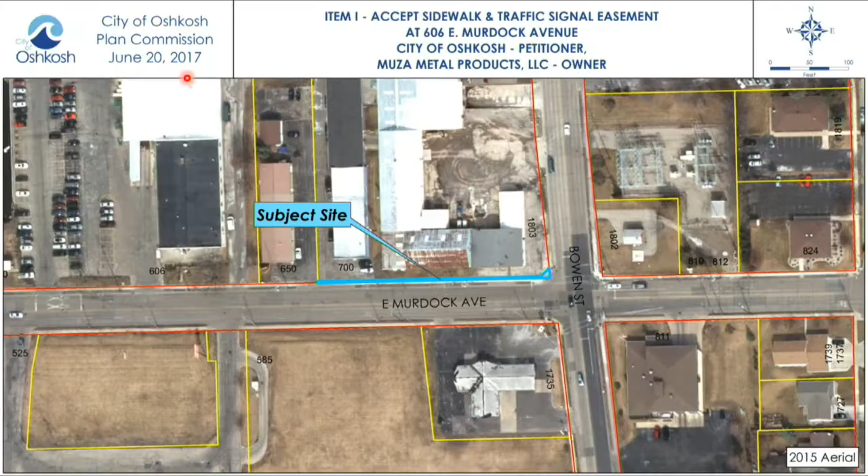The city's engineering division is requesting an easement from Muza Metal for installation of sidewalk, traffic signals, and related equipment. The easement will be about 2 feet wide, running 294 feet along the south property line to the southeast corner of the lot, including a 15.2 foot by 12 foot triangular area at the corner of Bowen Street and East Murdock Avenue. The easement is necessary to allow the sidewalk to be removed or moved away from the curb during reconstruction of this section of East Murdock Avenue, scheduled for later this year. It will also allow traffic signal equipment to be placed so as to maintain ADA accessible sidewalks and ramps, as well as create a larger terrace for snow storage.

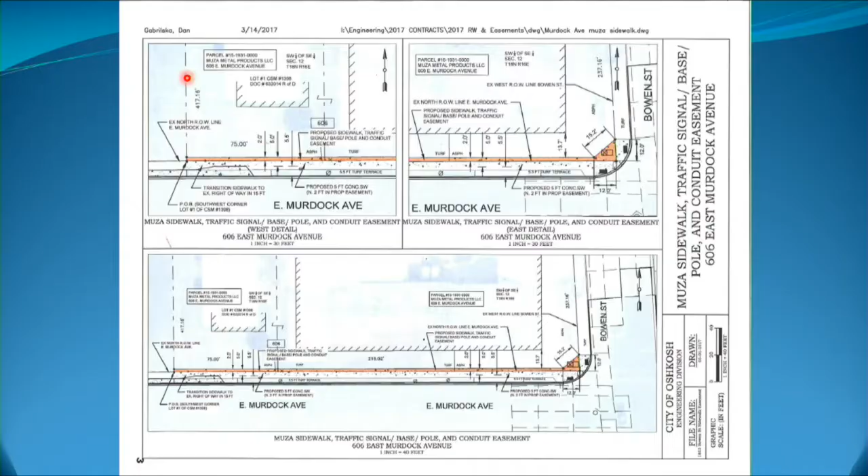Staff recommends approval of the acceptance of the proposed easement as requested. Any technical questions on this one? Seeing none, anyone here from the audience to speak to this item? Okay, back to the commission.

Move approval. Second. Any discussion on the motion? Okay, call the roll. Hintz, aye. Cummings, aye. Propp, aye. Kiefer, aye. Ford, aye. Borsak, aye. Wojtek, aye. Motion carried 7-0.

Let's move on to item number 2, access control variance to allow reduced spacing of driveways at the 2500 block of Harrison Street. Thank you.

The petitioner is requesting an access control variance to permit a 77-foot separation between driveways where municipal code requires a 125-foot separation. The subject site is a 1.7 acre parcel of land located on the west side of Harrison Street, south of East Packer Avenue and north of Libby Avenue.

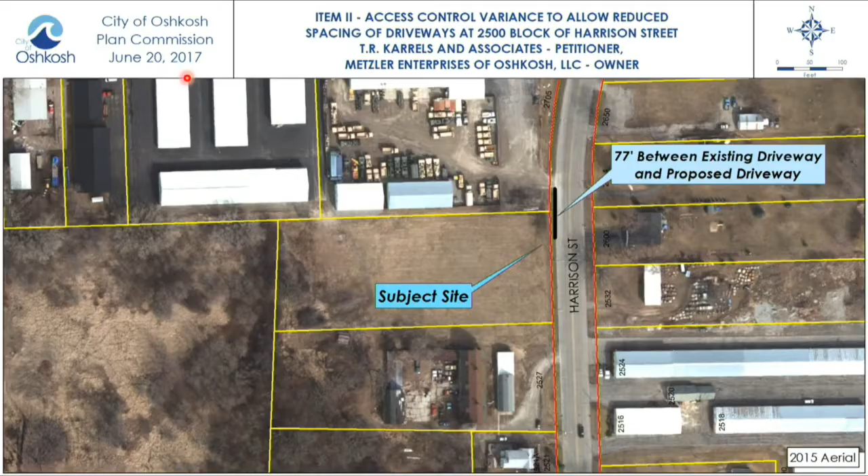Plans were recently approved for construction of a new personal storage facility at the site. Here's the plan for the new site. The petitioner has planned to construct a 17-unit personal storage facility on the subject lot. The proposed driveway access will be separated from the existing driveway on the property to the north by 77 feet. An access control variance is required as a 125-foot separation is required.

According to the applicant, the reason for the variance request is that an existing utility pole would need to be removed in order for the driveway to meet the minimum separation from the driveway to the north. The petitioner also states that the separation reduction would not cause any safety concerns, as the personal storage facility will have low traffic volume. Staff does not have any concerns with the driveway separation reduction, as this stretch of Harrison Street experiences relatively low traffic counts. The new use of the property should generate only minimal additional traffic, as the facility is expected to be accessed infrequently.

The existing driveway entrances to the north and south are separated by about 239 feet according to the site plan. This results in hardship, as it does not allow the new driveway to meet the 125-foot minimum spacing requirement from each of the existing neighboring driveways. The location of the existing utility pole also poses a hardship, as it is centrally located along the lot frontage, which restricts the driveway from being constructed further to the south.

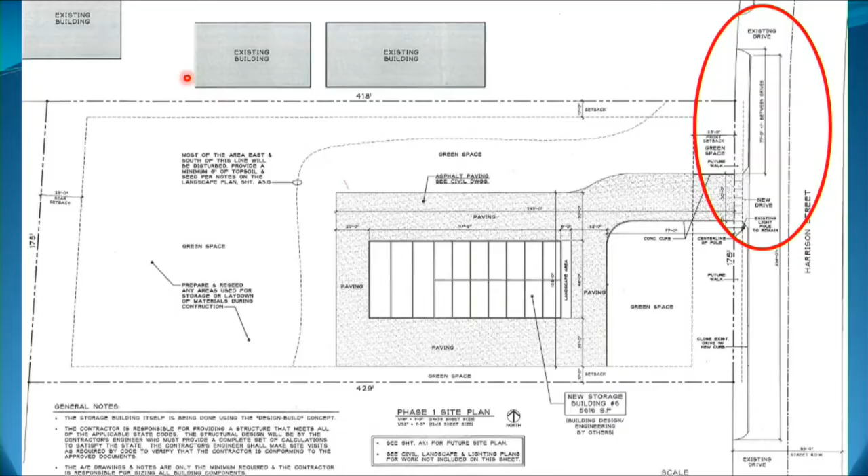Staff recommends approval of an access control variance to allow a 77-foot driveway separation at the 2500 block of Harrison Street as requested. Okay, technical questions?

None. Anyone here from the public to speak to this item today?

Okay, back to the commission. Move for approval? Any discussion on the motion? Okay, call the roll.

Hintz, Aye. Cummings, Aye. Propp, Aye. Kiefer, Aye. Ford, Aye. Borsuk, Aye. Wojtek, Aye. Motion carried 7-0.

Moving on, item number 3, approval of general development plan for multi-tenant retail office use located on the 1000 block of North Washburn Street. The applicant is requesting approval of a general development plan for the construction of a multi-tenant retail and office use located at the 1000 block of North Washburn Street.

The subject development area consists of a single vacant parcel, approximately 3.17 acres in size. The property has an SMU PD zoning designation, and the 10 and 20-year comprehensive land use plans recommend commercial development for the site. The proposed development site is bounded by North Washburn Street on the north and east, and big box retail establishments on the west, and Dick's Sporting Goods and PetSmart on the south. The land use pattern in the area is characterized by established retail and service uses such as Lowe's, Quick Trip, Panera Bread, and Dick's Sporting Goods.

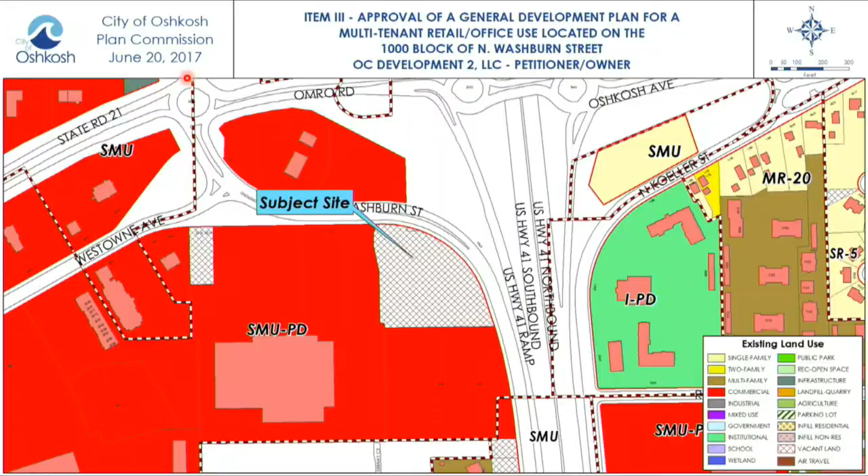The proposed uses are consistent with the recommended land use in the city's comprehensive plan, and both retail and office uses are permitted in the underlying suburban mixed-use zoning district. Approval of the proposed development plan will meet the requirements of the Planned Development Overlay District.

The proposed tenant spaces will have approximately 30 to 60 daily employees, and the businesses will be open during normal business hours of operation, typically between 6 a.m. and 10 p.m. The proposed development plan would include a total of 3 structures, which will house between 1 and 4 commercial units.

Phase 1 of the proposed development plan will include construction of a 2,501 square foot bank with a drive-through facility and an 8,252 square foot structure to house approximately 4 retail or commercial tenants. Other Phase 1 improvements include 3 refuse enclosure areas, surface parking lots, facilities, and site landscaping.

Phase 2 would include construction of a 5,746 square foot structure to house approximately 3 retail or commercial tenants. The buildings are proposed to be located on the north and east portion of the site, so that the main entrance areas face south and west towards the internal commercial campus. Parking areas are proposed to be located at the southwest corner of the site, abutting the existing internal shared roadway.

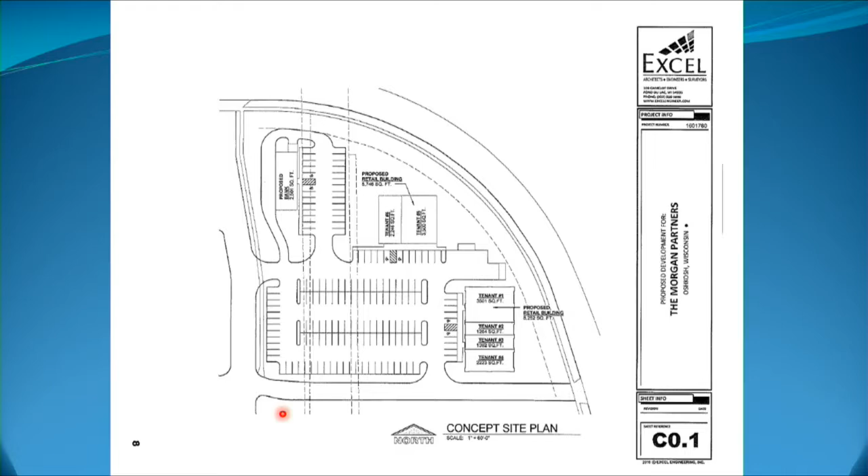Vehicular access to the site is proposed to be provided by 2 existing access drives running from North Washburn Street to the development site. The first existing access drive straddles the south property line, right here, and the second runs north-south from North Washburn Street to the internal roadway intersection.

The internal circulation for vehicles is well defined, with inclusion of landscape islands at entrances and parking rows, with the exception of pedestrian walks directly in front of the building's entrances, and an existing 5-foot wide walkway running along the west property line. The submitted plans do not provide any pedestrian connection to the public sidewalk on North Washburn Street or the walk at the internal roadway 4-way intersection.

Staff recommends a condition of approval that formal pedestrian access be provided connecting the pedestrian crossings at the internal roadway intersection through the subject development to the public sidewalk on North Washburn Street.

The proposed 159 parking spaces exceeds the range of the code-required minimum 78 stalls. Upon specific implementation plan review process, a conditional use permit would need to be granted to permit the parking facilities to exceed 125% of the development's minimum number of required parking spaces.

The submittal does not include a lighting or photometric plan, but all lighting on the site will be required to meet zoning code requirements, and it will be analyzed during the specific implementation plan review process.

Signage for the site is proposed to consist of both wall-mounted and ground signage. The petitioner is proposing a 12-foot tall multi-tenant monument sign, seen on this slide, to be located at the northeast corner of the subject site. The final signage plans will be required to meet code requirements and will be evaluated during the SIP approval process.

A conceptual landscaping plan for the site has been submitted with the application and includes a variety of shrubs and trees. The proposed landscaping is dispersed along building foundations and refuse enclosures and will buffer the paved areas throughout the development site. Internal landscaped parking lot islands are proposed to contain trees and other vegetation that will act to break up the mass of hard surface associated with the parking lot.

Staff identified that the internal landscape parking lot islands do not appear to meet the code required 7 feet wide and 250 square foot minimum area. Staff recommends that the petitioner adjust the width of the parking lot landscape islands to meet code requirements to ensure that future landscaping can be supported. The final landscape plan will need to meet zoning code requirements and will be analyzed during the SIP review process.

The petitioner has indicated that stormwater from the site will be directed to the stormwater detention basin on the neighboring Lowe's site, which was sized to take in the additional volumes for the entire developable area. The Department of Public Works has reviewed the proposed development plan and noted that documentation and designs must meet the city's stormwater performance criteria for both water quantity and quality control. Final stormwater management plans will need to be reviewed and approved by the Department of Public Works as part of the site plan review process.

Proposed building elevations have not been submitted at this time, but will be submitted and analyzed during the SIP review process. The proposed structures will need to meet the commercial building design standards, which are found in the zoning ordinance.

Staff believes that the development will have a positive impact on surrounding lands, and will be harmonious with the intended character of the general vicinity, and will not be detrimental to neighboring properties or the community as a whole. Staff also feels that the proposal reflects the city's development and planning policies, enhances the appearance of the area, and is architecturally compatible with nearby and adjacent structures.

As such, staff recommends approval of the general development plan with the following conditions. Formal pedestrian access separate and distinct from the vehicle drive lanes be provided connecting the pedestrian crossings at the internal roadway intersection through the subject development to the public sidewalk on North Washburn Street. A conditional use permit be granted to permit the parking facilities to exceed 125% of the development's minimum number of required parking spaces in conjunction with specific implementation plan review process, and proposed internal parking lot landscape islands meet code requirements upon specific implementation plan review process.

All right, thank you. Technical questions?

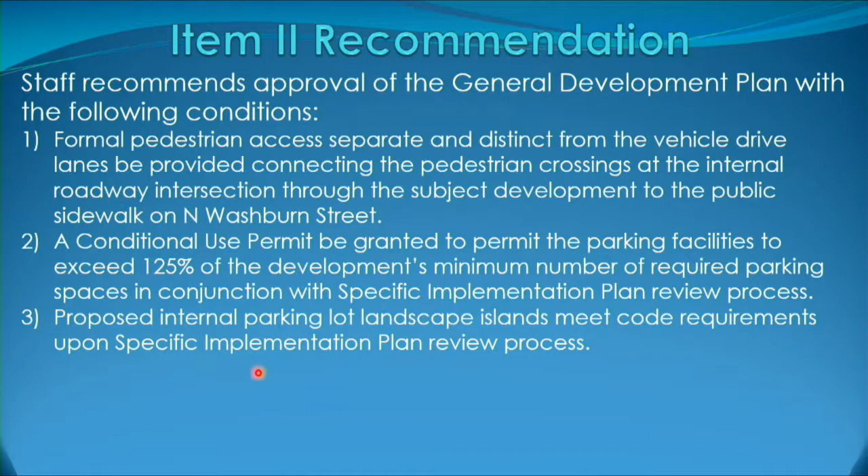Gaddy? This is probably a question for the petitioner. I hope they're here. The number of parking spaces seems utterly excessive. It's twice the number of the maximum that our parking ordinance would suggest. I don't know if staff wants to comment on this now, or we can wait until the petitioner talks to us.

Well, Ed was on his way back from Green Bay. He got sidetracked, so he was supposed to be here. So, let's see if we can go to a couple other questions first. Okay, but it is, you're right. It is larger than we allow right now.

I think some of the responses that you might get on this particular one is that you're kind of confined to a certain footprint because you've got Dick's. Yeah, no, I understand that. So the only way to do it would be you'd be decreasing some of those areas in favor of green space. Potentially get some green space, but I'd defer to Ed on that, when he shows up. Or David, that can be, it still has to come back through SIP as well.

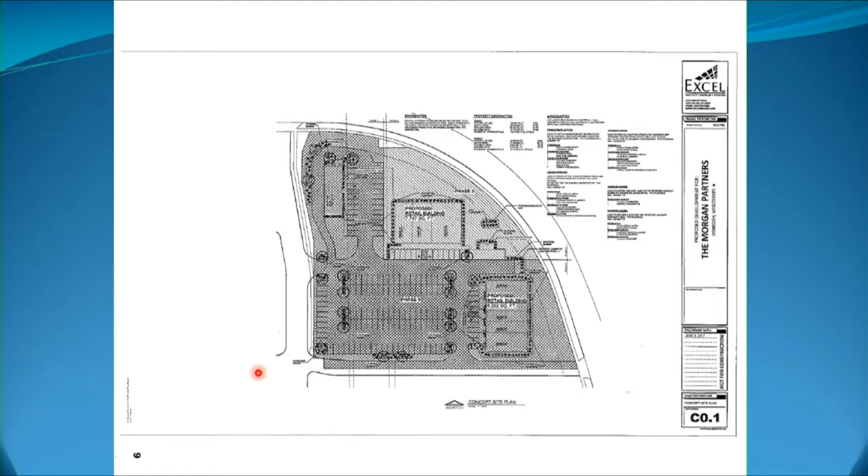Just David and then Steve? Will the building designs come back here for SIP? That is correct. When we broke out the process, the GDP versus the SIP, the GDP was meant to be kind of like a preliminary plat, so you would just get a concept of basically what it is before they had to submit the detailed plans for the landscaping, the architecture and all that.

That's correct. But the process is also supposed to identify any concerns that you might have going forward when the SIP comes forward. So if there's some concerns, we can put that in. The applicant will know that. We can get that in the minutes. Things like if Ed's not here, the parking situation and the reasoning for that.

And the follow-up to that, or the genesis of that question, when we had some other development in that general area, we had concerns about how it appeared either from 41 or from Washburn. I would hope that it'd be conveyed to petitioner our expectations of how it's going to look facing the corridor and the frontage road.

And the good news is the buildings are close to the street as opposed to looking at parking, but hopefully they're nice to look at. Exactly, because it's going to be the backside of the building. We've had the same concerns along Westtown, if you recall, because you have all the stuff between Westtown and 21, and that's where we put a lot of emphasis on the back of the development, so it wouldn't look like the back of the development. I think you want the same thing here.

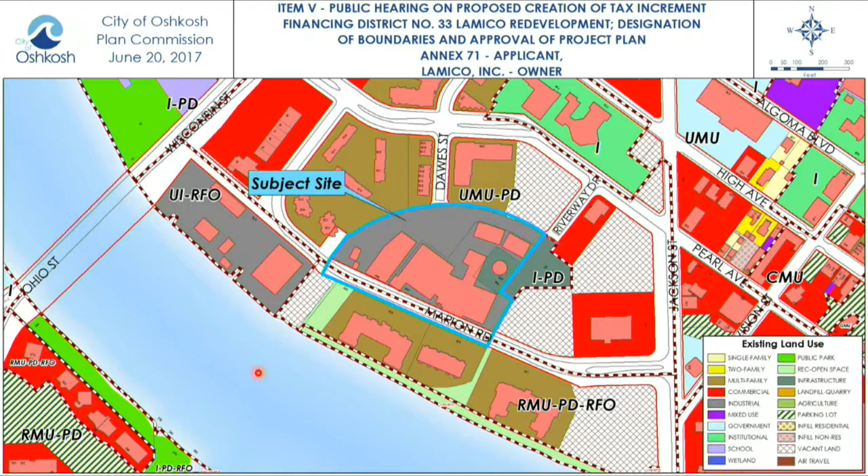The project plan, we'll go over a little bit of it, also includes costs, and hopefully Jeff put it in there. There's an aerial of the site so you can see what's going on in the area. Here's the old Lamico site, here's the water tower site, and there's another one being built right now that you can see down there. You can see the kind of development pattern that's in the area. This is the newest building being constructed right now.

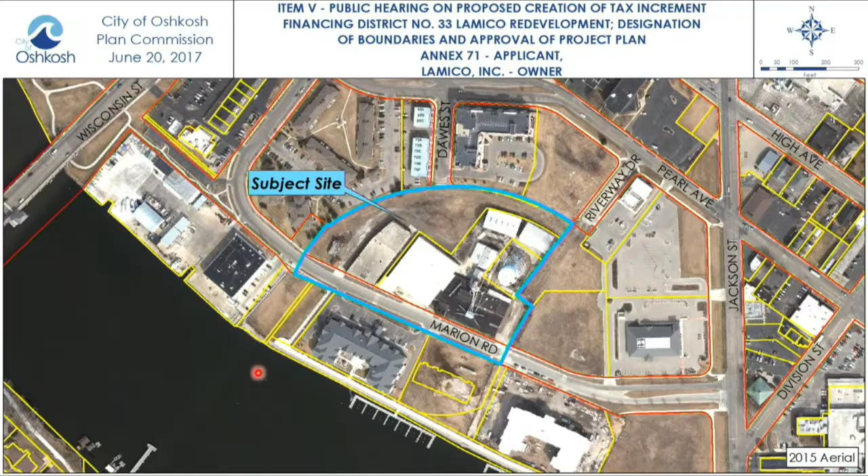But also as part of the project plan, we're including costs for cul-de-sac construction here at Dawes and here at Riverway, and we're also including funds for a pedestrian trail to connect to our regional trail system. So you'll be able to access the trail and go up between these two sites where we have an access easement and that small public park area, so they'll connect up to Riverway. So that's included into there.

Some other utility costs are included. They're also widening out the sidewalk along this property. We are, as a result of the creation of this district, we're proposing, we're estimating about $15 million in increment value that'll be offset on here. Trying to figure out what else.

Well, there are things I wanted to hit on in the particular plan. Let's go to the project plan itself, and we'll go over a couple of the pages in there for your edification. Page number 9, and it's all important, but I want to hit some of the highlights. Page number 9 kind of shows the parcel identification map. So you can see the main bit of the TIF is comprised of the 2 Lamico properties, and then the 2 city properties in there.

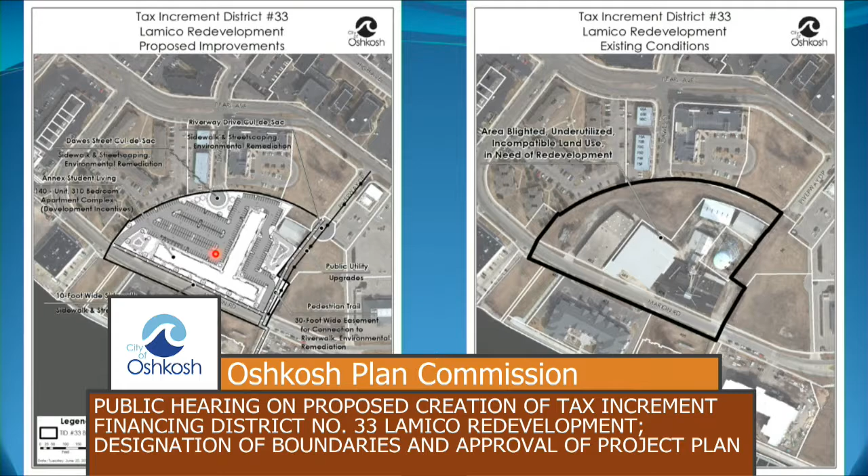Well, what's coming down is the current tower's going over here. We're swapping this land out for some land up in this neck of the woods, for the future tower. It's in the very northeast corner of the site, basically on the west end of that cul-de-sac bulb. You can see how their site plan is not developed in here. They still have the existing building, and that piece to the north is where we're looking at the proposed swap for in the future.

As you said, 75 years from now, when we have to rebuild the tower again, we needed to keep some land set aside because the tower needs to stay in service during construction, just as this one is. So that's where that land swap comes in - the development is getting the site the existing water tower is currently on, and then they're giving us an equivalent amount of land for us to be able to build that next one down the road.

Thank you. And so what's going to happen is, as the site develops, it will develop in phases. The first part will develop all this, and then once the tower goes down, they'll fill this area in once we complete the land swap.

There's a lot of coordination going on right now between their construction forces and our staff in Public Works, as well as our contractor, to make sure we can coordinate when they need that area and when we can get the existing tower down to facilitate that. So their contractor and our contractor are going to be working together on site for a lengthy amount of time until we can get everything done.

Other technical questions?

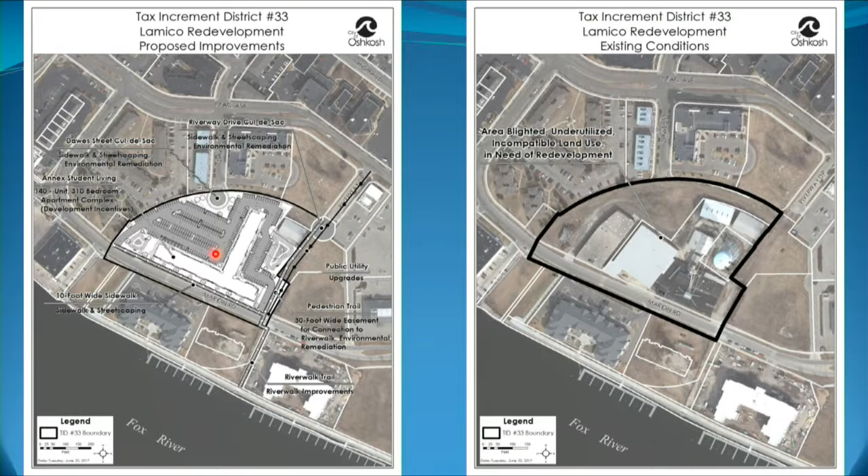Okay, seeing none, anyone here from the public to speak to this item today? This is the public hearing for this particular project. We're opening the public hearing.

Going once? Meaning the public can come up and comment if there are any comments out there?

Okay, close the public hearing. Back to the commission.

Thoughts? Do we support this? Do we have questions? I see you wanting to say something, David.

Well, I'm just trying to figure out, do we frame the motion for the affirmative? How do we frame that? Correct, so if you support it, yeah, for the record. But is there special verbiage because this was out of... we've done this before, yeah, I couldn't remember. That's usually when we want to, when we deny things - when we come forward with denial, we still do everything in the affirmative.

All right, I move approval of the creation of TID District number 33, specifically the project plan and boundaries for TID number 33. That is correct. Thank you for this.

Is there a second? I'll second. Moved and seconded to approve this. Are there any questions or any last comments?

All right, call the roll then, Deb. Hintz, Aye. Cummings, Aye. Propp, Aye. Kiefer, Aye. Ford, Aye. Forsyth, aye. Voitek, Aye. Motion carried 7-0.